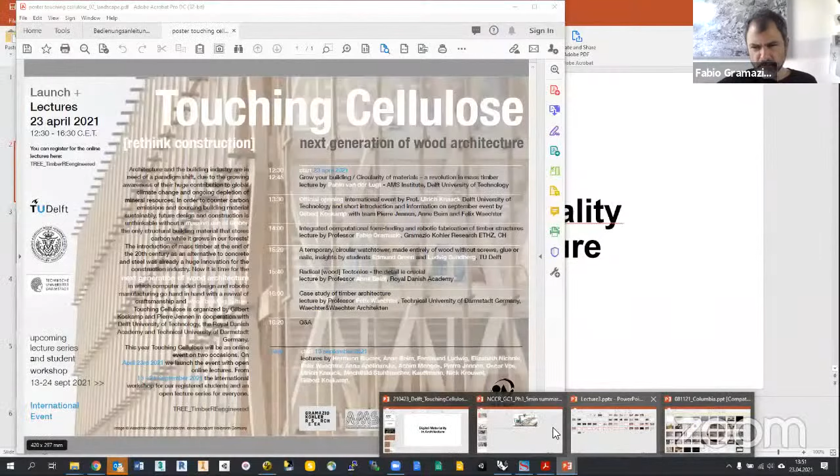Screen. Here we go. Do you see the screen? Yes, perfect. Thank you. Excellent.

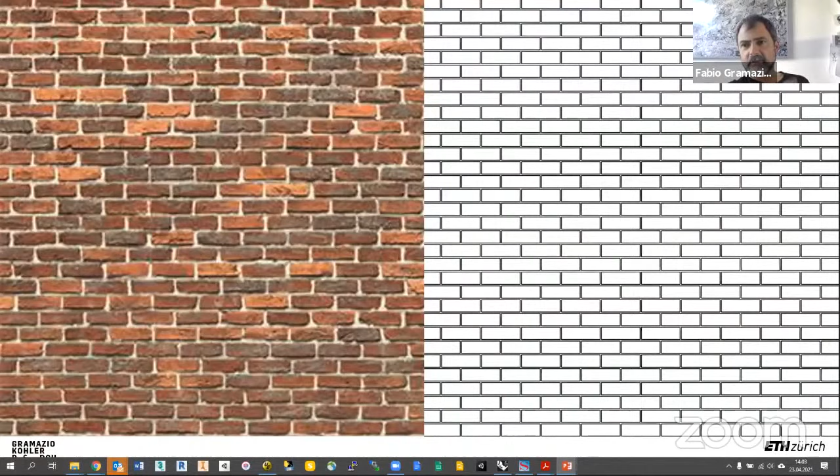And the question is, in architecture, in design, how do we represent it? What's the notation we have or can use to describe it? First of all, a very simple one is to just draw it. This is what you see here. You can draw it by hand, with pencil, print it, whatever, but you have a visual depiction of it. This is very powerful as a notation because you immediately understand what it is. But when it comes to construction, it's also very weak because it's very complex, very unclear and very inefficient.

Now, the history of construction, or of culture and construction, has generated a concept like the bond, which is nothing else than a set of rules shared in a cultural area that encapsulate everything, encapsulate the sequence. So everybody understands how a stretcher works, and every mason can just do it. And the only thing humans need to do a stretcher bond is a few simple parameters that boil down to the element, the size of the element, the type of the element, the length and the height of the wall. That's it. There is this advantage here that with a minimal description, a minimal amount of data, you're able to instruct something very complex in a very lean way.

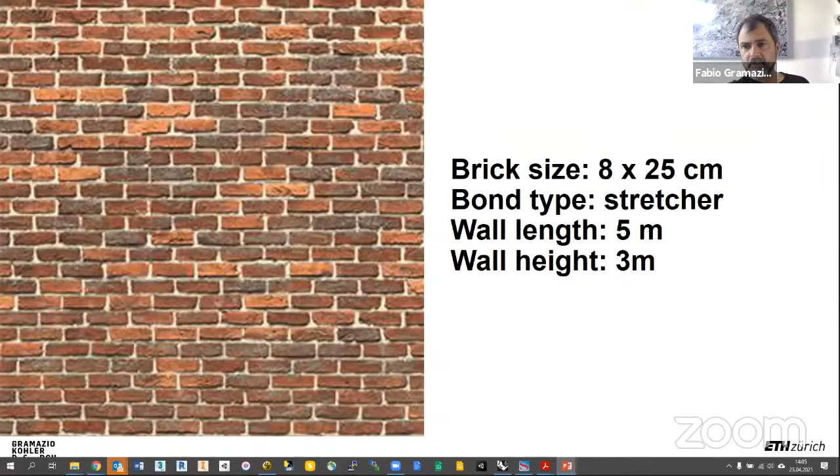Now the question for us, when it comes to machines, is what is the equivalent in digital fabrication? If we have to talk to machines instead of humans on a building site, clearly, even if now we have artificial intelligence and machine learning, the machine doesn't understand what a stretcher bond is. How should she? Machines understand data, numbers. And the nice thing here, this is why I use this example to explain the problem and its potential, is that there is an algorithm that is the basic control structure of everything: the loop. A loop in programming is just the instruction to repeat an action or a computation a certain number of times, until a certain condition is satisfied, for example.

Now, a brick wall is nothing else than the direct correspondent of a nested loop. A nested loop is as simple as a loop. It's just two loops nested one into the other. And this is what you see here. You know, for, then again for.

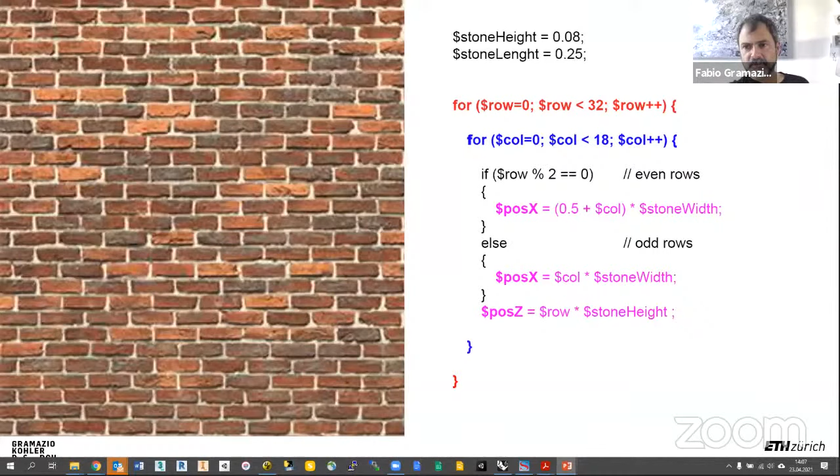Once this is done, in the outer loop, the position of the whole thing is raised by 1 brick height, shifted by half brick length, and repeated. So another row, and when you reach the ceiling, you're done. The algorithm stops. So this is a different notation to describe the exact same things to a machine. Now you could say, so what? The trick is here.

If now we look at this code and recognize that we don't have to use it just like this, but we can add, for example, these 2 pink lines at the bottom. Everything else is the same. 2 pink lines have been added, and there is some computation happening there that is, as the names of the variables suggest, about a rotation. So the brick is not just placed, but rotated on its center point.

And these 2 lines are an act of design. This is the human on the left. In this case, it's a student. The student looks at the material, tests with his hands the possibilities in space to do something, and then he writes these 2 lines. So actually he's designing, and this stretcher bond is not a generic stretcher bond anymore, but is outputting this.

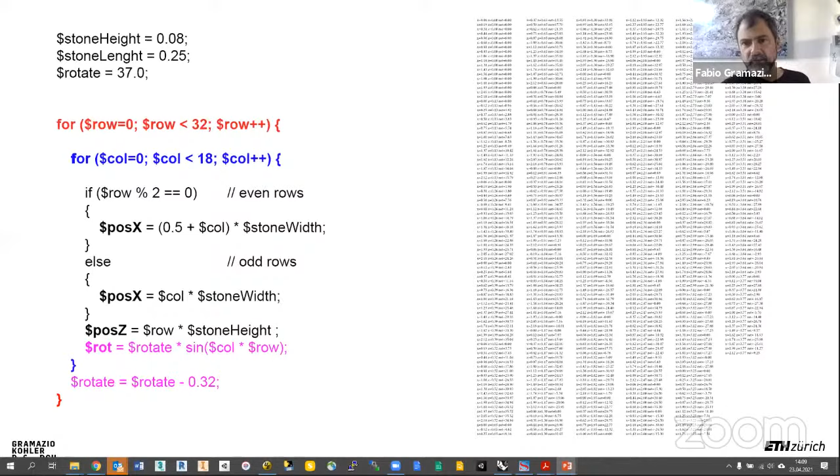So it's a very unreadable list of numbers, but you can trust me, these numbers are nothing else than XY positions and a rotation. The XY position is easy. The rotation is not, because each single brick of the wall we have seen before now has an individual rotation. And this is the thing you cannot communicate anymore to a human, but can communicate to the machine. And you can communicate it better because the machine doesn't understand what a stretcher bond is, but the machine understands very easily a number, because it's the only thing a machine understands. And the number correlates to the position of a motor, to an axis, and at the end to a position in space.

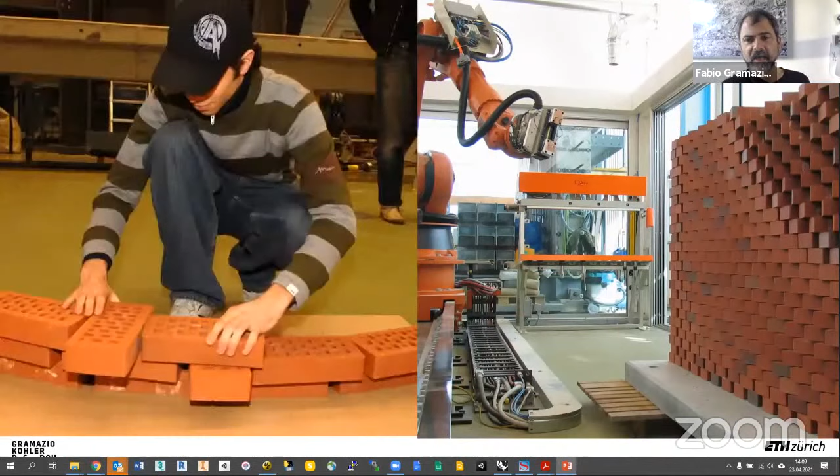So what we have here, if we go back to the beginning, is the possibility to directly connect the act of design by a human with a machinic execution. And this is extremely powerful for a few reasons. First, because it goes beyond automation. It's not about automating something we already do. It's about reaching out into a domain to which we don't usually have access.

And the second thing is that there is no competition between the human and the machine here, because the human needs the machine. Otherwise, there is no reason to design 5,000 bricks with an individual rotation. And the machine needs the human, because the machine is not designing anything. The machine is just executing things.

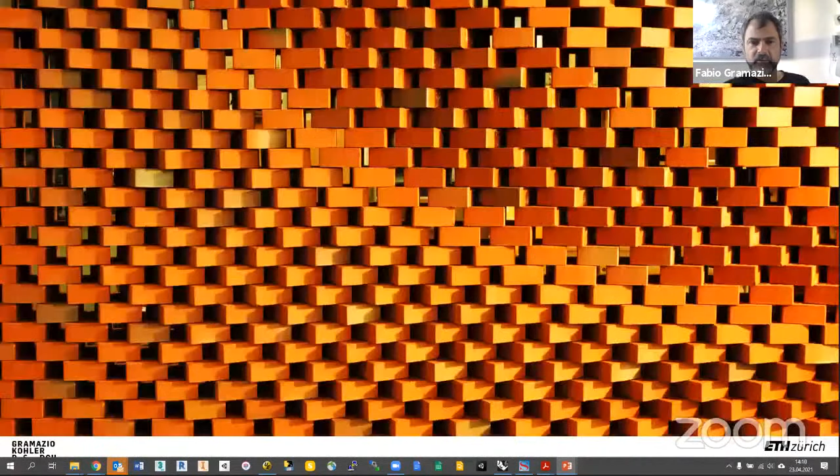And this very simple exercise was the very first experiment with this machine when we installed it as a proof of concept. And the bricks are more or less the consequence of pragmatism, because we needed elements and we looked for interesting elements we could get for free or very cheap, and then suddenly we had this in front of us, and at this moment we coined the term digital materiality, just instinctively.

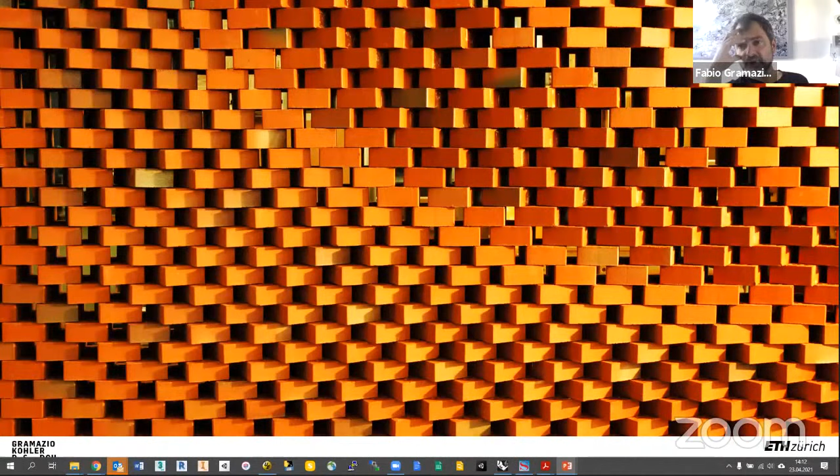And throughout the years, we started to understand what it really is, because here something happens that is related to the physicality, so three-dimensional space. It's all about light, and light is just reflection of waves on a surface, and it's about the relationship between the position of the light source and us, the observer. Light changes color or makes color visible at all.

And at the same time, beyond this very familiar material, something happens that we have never seen so far. We were used to seeing these things in the two-dimensional domain of graphics. Computer graphics in the 90s were already popular, but it was always two-dimensional. Here it's woven into the material. So it's these two apparently very different domains that in the 90s, when we were architecturally socialized, were enemies: the digital and the physical, the digital and the material, the digital and the analog, no communication. Here they come together and they merge.

And with this knowledge, and this is just a few images, we did one or two projects where we scaled this up, and then really understood what happens at that certain scale.

What is this? What is the potential of being able to control material at a very high resolution? And we understood that we don't need a techno material. We need very traditional materials, and just need to inform them differently, and then they become a new material.

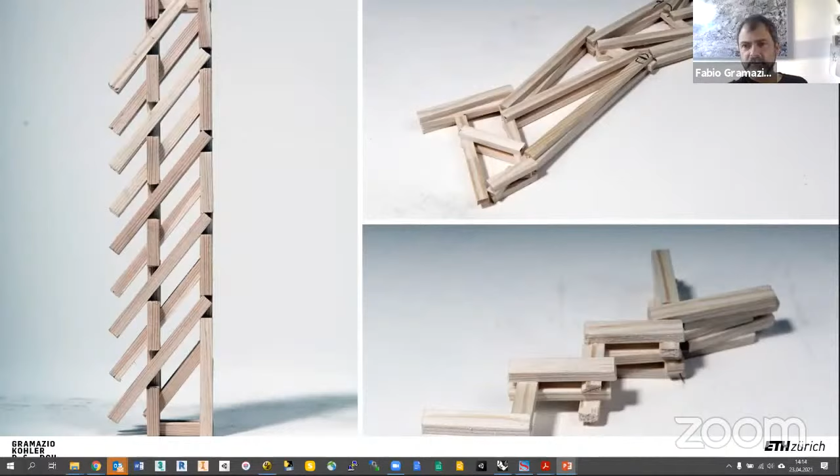Okay, now let's move to timber finally. These are projects that I haven't shown for probably about 10 years, but thinking this morning about how to tell this story, I searched for them. These were first studio works, 2008. This was 2 years after starting at ETH with this machine, where at a certain point we wanted to explore what happens if this bulk material, the brick, so standardized, mass-produced material, can not only be placed at a certain position in space, but can also be processed.

And timber is nice because it's an industrial mass-produced material that comes in many shapes and CLTs, layerings, and so on. But actually, if you have a slat, for example, you can cut it to length with a very simple operation. You can cut it to length and you can choose the angle of this cut without adding any complexity to the fabrication process. And here you see first studies.

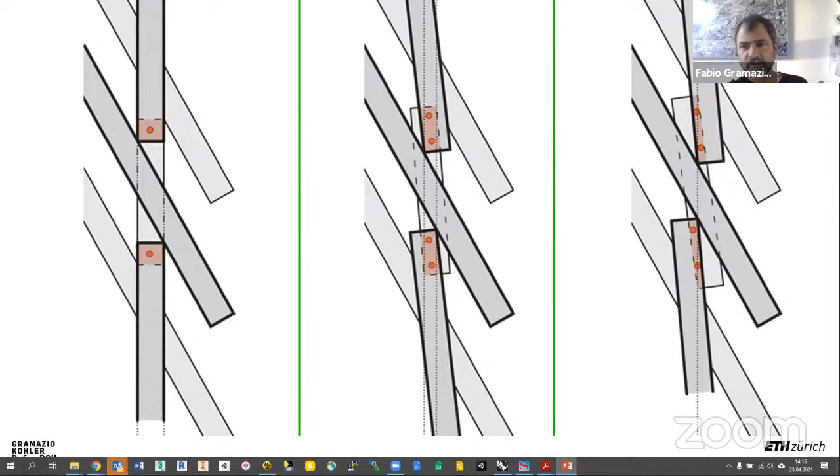These are model studies with students where we try to find layering logics that would allow for, first of all, parametric description of it, and then design, the manipulation of these things. This happens physically, this happens then digitally. You have to find out, okay, what is the degree of freedom? When do things collide? How is the relationship between these things?

And then we built this. This was with our first robot. A very simple process. The machine picks a long slat, orients it, gives it the length, and then the human cuts, and the second human, once it's in place, screws it in place. So actually it's an identical process as with the brick, but with one additional degree of freedom, the length. And what this produces is extremely interesting.

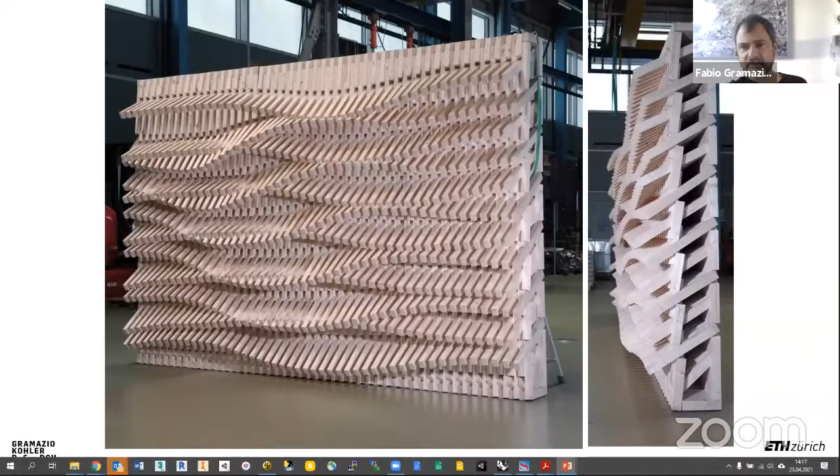This is the stacking. And these were these first results. It's in the same format as the previously shown brick wall. It's prototypes. It's 3 meter by 2. And here you see 3 different variations, where with one mass-produced timber element, always the same section, with one process, so one cut, and the computational design process, plus the very simple pick and place process performed by the industrial robot, these emerge.

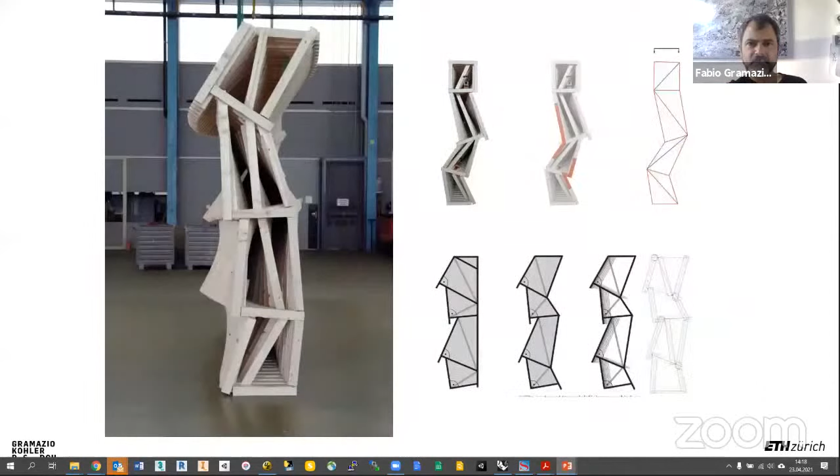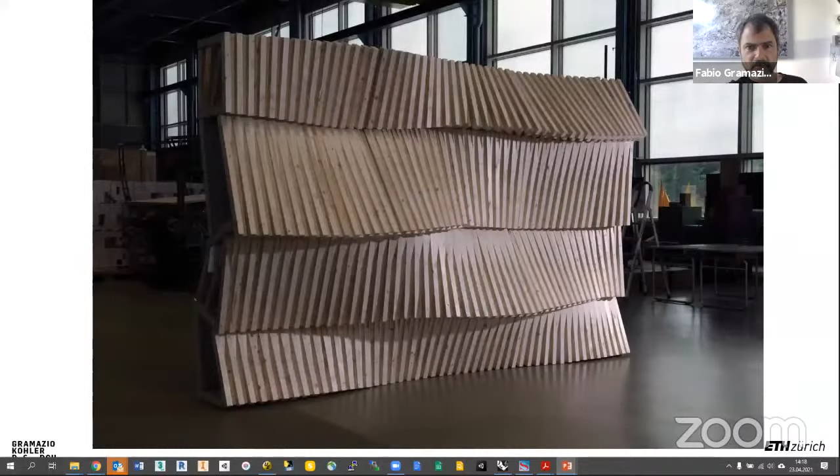The close up. This is interesting because this is the backside of the same, completely different. Although, if you look, actually you sense what's happening on the other side, but it's extremely minimal. This is the second one, slightly more complex, also very beautiful. It's just additions of discrete elements. This again is the backside of this same element.

Okay, so these were small scale student experiments. There was discussion, yes, but structural performance and costs and all these things were not a topic. It was really about discovering something. And then a few years later, we got the chance, and this is where Anya comes into play. She came from Foster and Partners to the professorship, and started working on this project I'm going to show now, the sequential roof.

5 years ago, we got a new building, a new lab for the institute. And by some very interesting coincidence, back then the board of ETH was extremely open to experiments. And we proposed to them to integrate research into the building. So if you were building anyway, it would be a good chance to test something. And we said, let's scale up this timber structure. And we came up, this is the final project, with this. This is a timber roof structure.

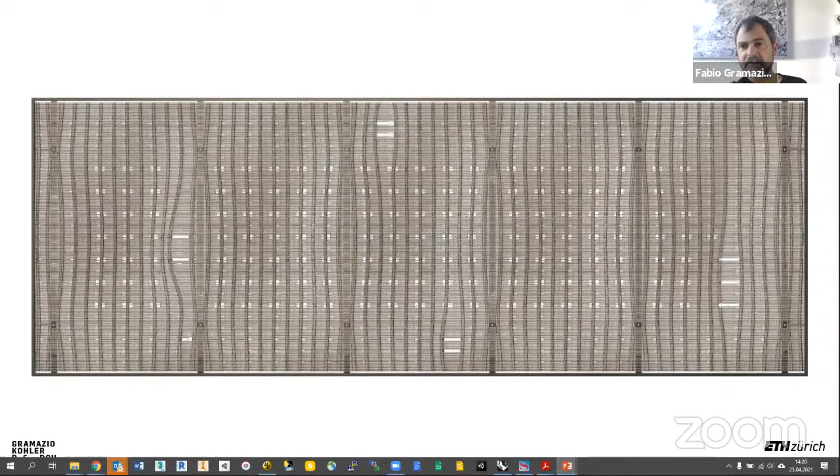And if you look at this image, you recognize how at this scale and this resolution, you know, how soft it gets. This feels and is a fabric, textile. Of course, when it's built, it's not a textile anymore, then it's very structural, but as long as you design with it, it's malleable, because every piece is potentially and actually different, or doesn't have any reason to be identical to the last one.

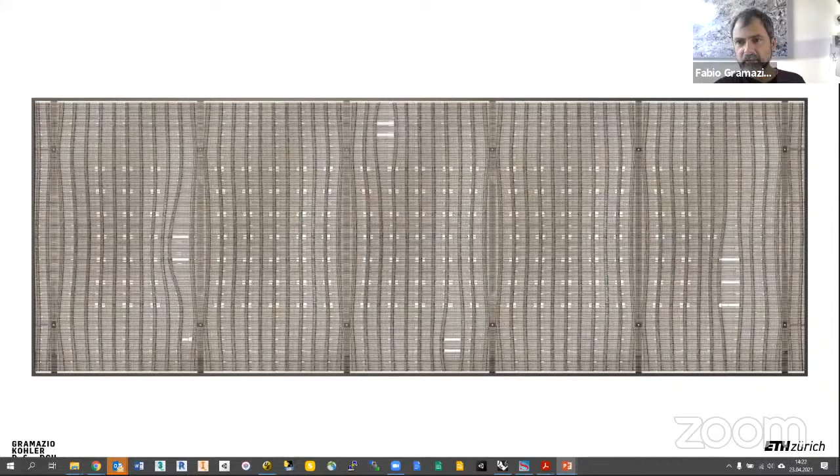And this allows you, for example, you see this irregularity. These are smoke ducts from the staircases that have to go through, and everybody that already built knows that these things change all the time, and the final dimensional numbers you get often too late, and then you have just to cut through your structure, which is ugly. With this design principle, we were able just to tell the fabric to make place for these ducts there. And because it's all parametric, until the day when production started, we were able to change this.

Okay, this is the constructive system. So it's trusses, I said 15 meters, with diagonals in them. It's produced in layers of heights of 120. They are, of course, all different, because there is complete freedom of shape. And the interesting thing here is to deform this roof doesn't cost anything.

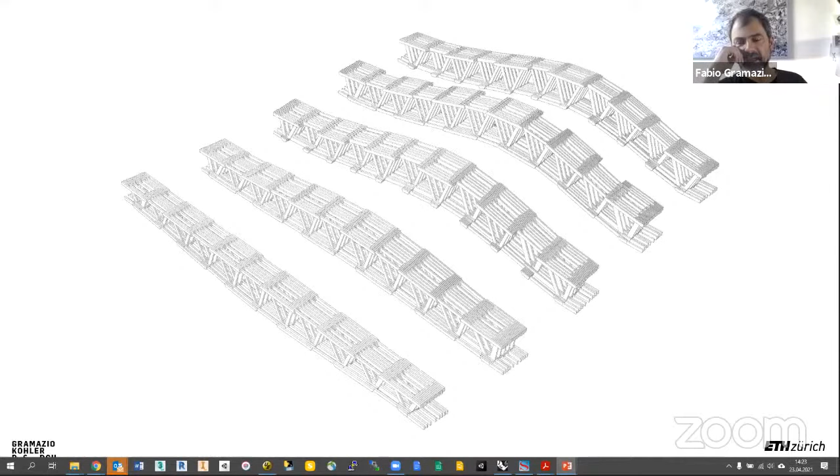So normally you have a very, let's say, rigid correlation between form and costs. As long as things are planar or simple, then it's cheap. And if you leave the planarity, then it's not just a bit more expensive, but it's 3 times the price. This is the logic of things as we know them. With such a process, it doesn't make any difference. This roof could have any shape, it would cost exactly the same and need almost the same amount of material, because it's all information making the difference.

Yeah. The shape here in this roof, of course, was generated by the water flow. The water evacuation is in the columns of the building. We'll see later on. So we needed 12 low points where water would flow and would be collected and evacuated. And so this very simple design driver was informing this free form that, of course, in the interior then structures the space, brings in a rhythm and so on, and plays with the light.

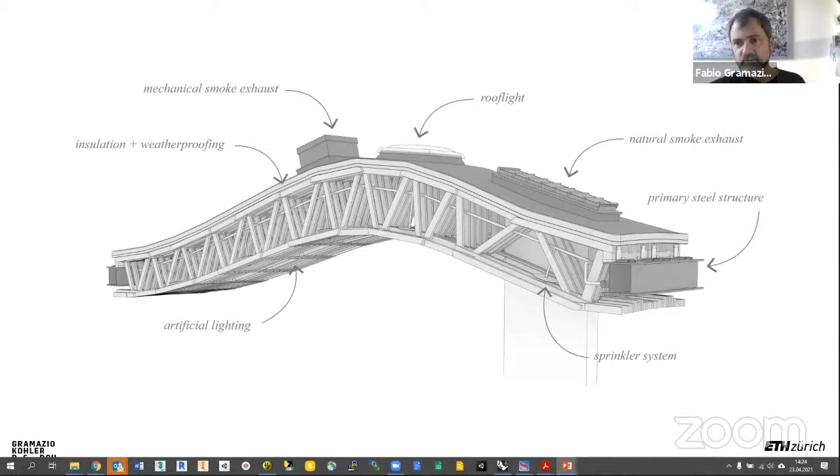Here you see, this is the prefabrication paradigm. If you do this in a shop, then you can install all the subsystems already. This is particularly important if you have a complex and custom form, because to introduce sprinkler pipes in here on a later stage would be a nightmare. Here it's extremely simple because it's open.

And what you see here is the design, or let's say a superimposition of different design models, where the bottom right of it is what is interesting for us, because this is the designer's first decision about the logic of the roof. So you have to ask yourself, if you want to control the mutual relationship of 50,000 parts, you need to decide how to control them. So what are the parameters that you want to be able to modify while designing? So what is your

tool? And you want to be ideally free to manipulate, in this case, these sectional lines, until the very last moment. And everything else has to propagate, because the next stage that you see going up towards the left top, this is the structural model. It's an RSTAB model that is extremely important, because in such a design, the structural engineer has to be included in the loop. And everything has to be automated, because there is no structural engineer that wants to model 50,000 different parts in order to understand what the forces are. And even if you would find such a crazy engineer, you would have just one iteration.

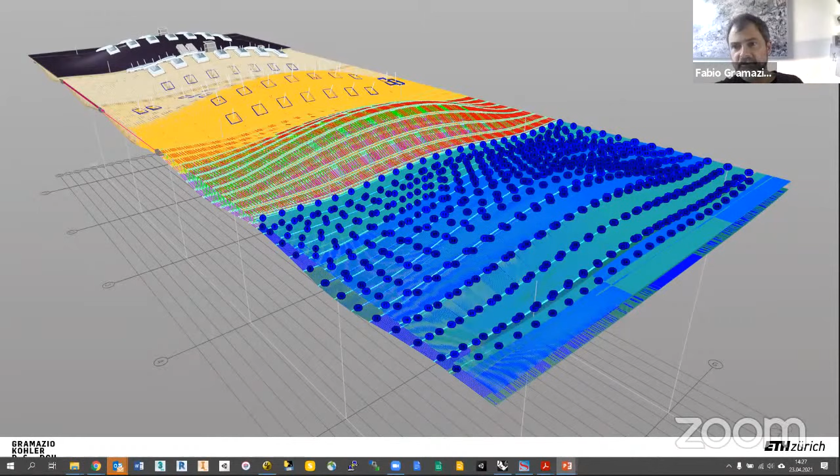This BIM model is dynamic, because if I change the shape of one of these control lines, the BIM model adapts to it, or tells me, listen, this is not possible. I get into this conflict.

And the connection in general, but in timber architecture, is extremely important, because the connection is the weak point. Normally, structures get dimensioned against the connection and not the members. This is also why there is a lot of engineering done in super sophisticated timber plates, connectors, and stuff like this that introduce steel. So we'll talk about this later.

Our wish here was to be extremely simple. And we identified the nail as being this connection system that is super flexible, because I can scale it. I can say I have just one nail, two nails, I have 15 nails if I really need, to transfer loads. And with the digital tool, with the robot, I can shoot them wherever I wish.

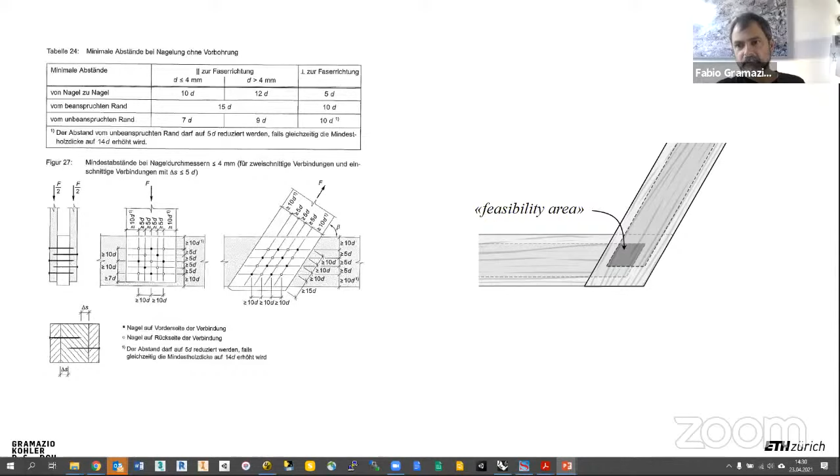that tells you that you need a certain spacing between the nails, and spacing between the nails and the edge of the overlapping area. Very simple, empirically validated things that become a problem if you have almost 1 million nails. Because over 50,000 elements, you have 1 million nails. This feasibility area, this is what I said before, can dramatically change. This is why you need computation, again, to find a place where to put these connectors.

And because you will not always find a solution, then you need a strategy on how to react to this unfeasible situation. As you see here, on the very left you have the problem: nails that are outside the overlapping, the feasibility area. And what you can do is to extend the horizontal one by 1-2 centimeters or whatever. So you increase the feasibility area, or you can increase or change the section.

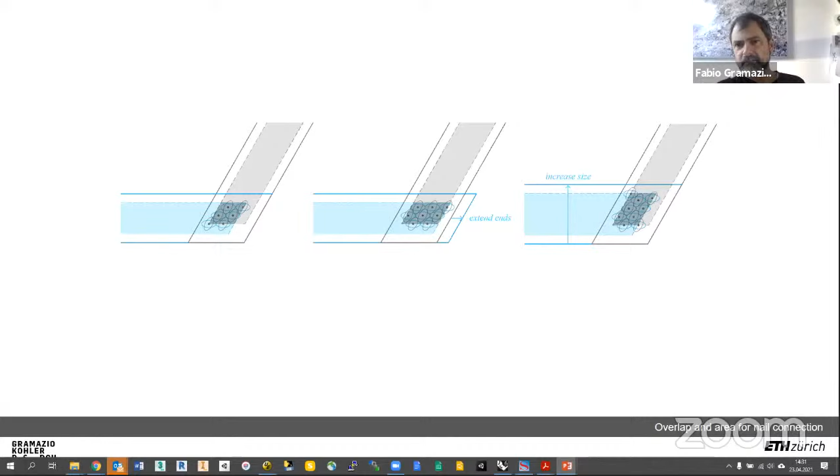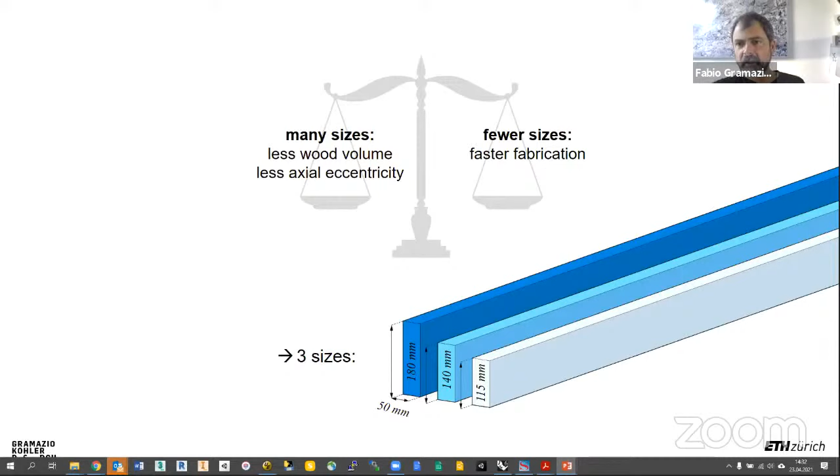Now, the first solution is the cheap one because it's just information. So you give it a bit more. The second one is more tricky and needed optimization, because of course you don't want to lose the beauty and the elegance of the process, the leanness of the process, just having one slat, 8 meters long, being cut in parts and placed. If you start to introduce two, it's already more complex. You have to have two places where to store them. If you have three... so it's a question of trade-off. How many different sizes do you want?

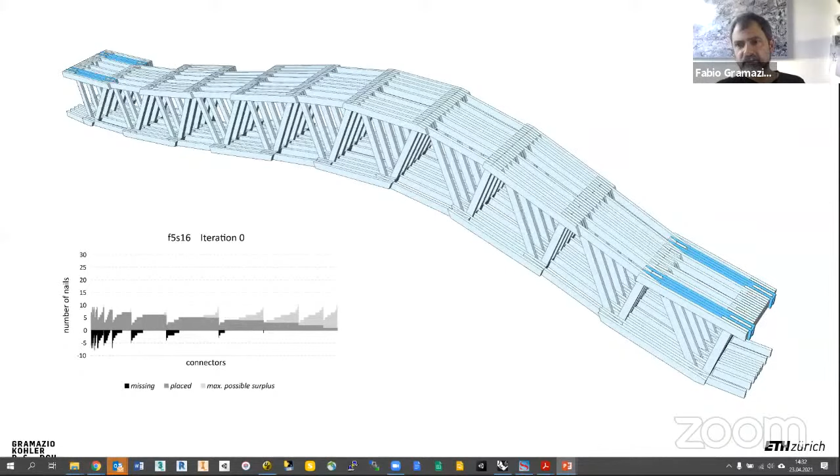And this was then a classical optimization task, where you algorithmically go through all these trusses and try, by trial and error, to solve the problems iteratively and understand what this means. You see here iterations. These were the three different height sections that were chosen, and by doing this many times, you can find out where you have this sweet spot, where with the least amount of different cross sections you have the best result.

Because to increase the cross section also means that you need more cubic meters. So you're using more material. Now you could argue that with timber it's not so dramatically important to save material as with concrete or steel, but still. And this was the final solution. So we ended up almost where we started. It's a very small increase in material, because we found the elements where this

is absolutely needed. And having this freedom of mixing different cross sections avoided what normally happens in architecture for many reasons, economy, but also intellectual laziness: the simple solution, just to increase them all. You see which one is the weakest one, let's do them all like this. This is also the reason why we use so much concrete. Design is not complex and elegant anymore, because it's simpler to calculate, to design, but also to produce.

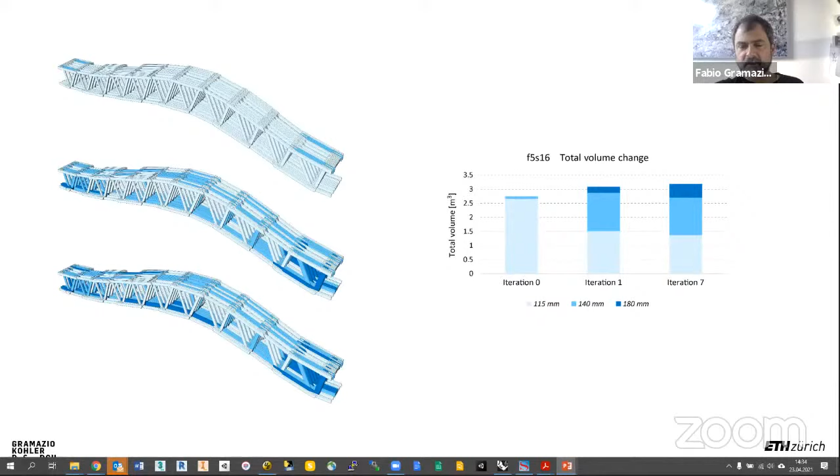This has to be automated, and the interface has to be clear, so that there is no manual intervention needed in order to validate a new design option. Then you need the fabrication data. For example, the nails, because there are things that pop up that influence, propagate back to the model.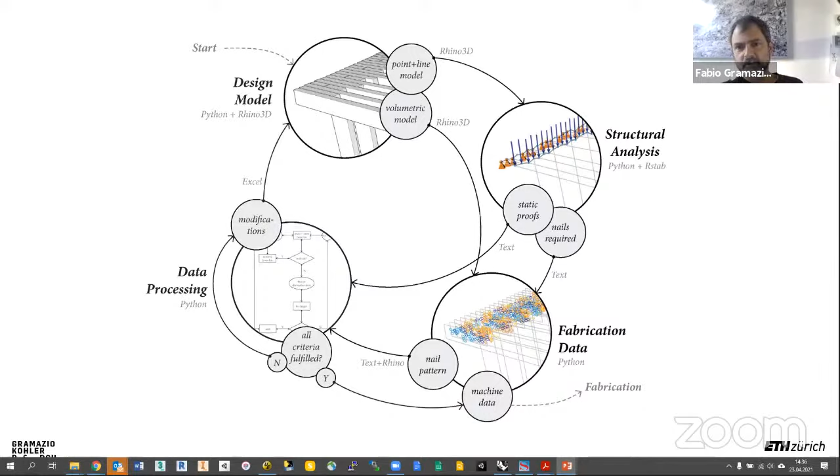And the last step is the data processing. That's where the results of these analytical steps are, let's say, inputted into the design model. And then you start with a new geometry or with new cross sections and whatever, and you do it again and again and again until you have found, I wouldn't talk about an ideal situation, but a good one. The best doesn't exist, but there are many good ones. And it's about finding a good one.

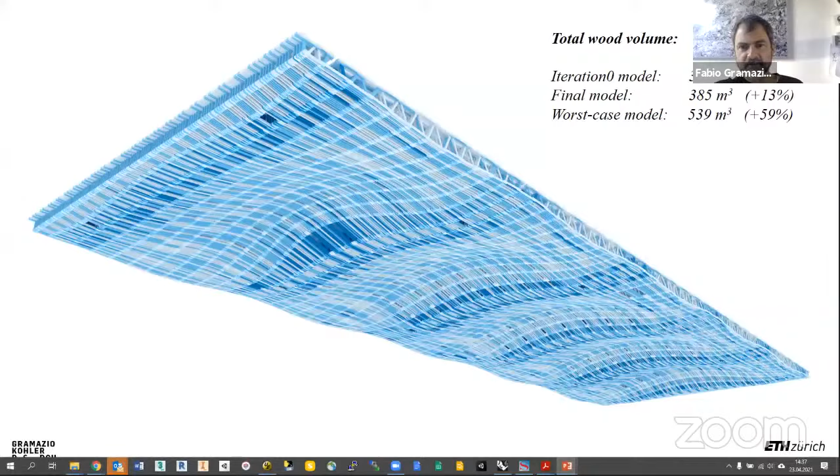Here again, now this optimization process on the whole roof. You see, with the small cross section, we would have had 340 cubic meters, while with the final model, we ended up with 390. And if you would have just said, okay, let's go for the worst case, then we would have had 540. And these are big differences. And the only thing is computation in between that makes it possible.

Then, of course, these are all theoretical models. I mean, not theoretical, just models. But at the end, you need to go and test these structures, real scale, in order to understand, to validate your assumptions, your models. And this is then the final result. I think I have an audio here.

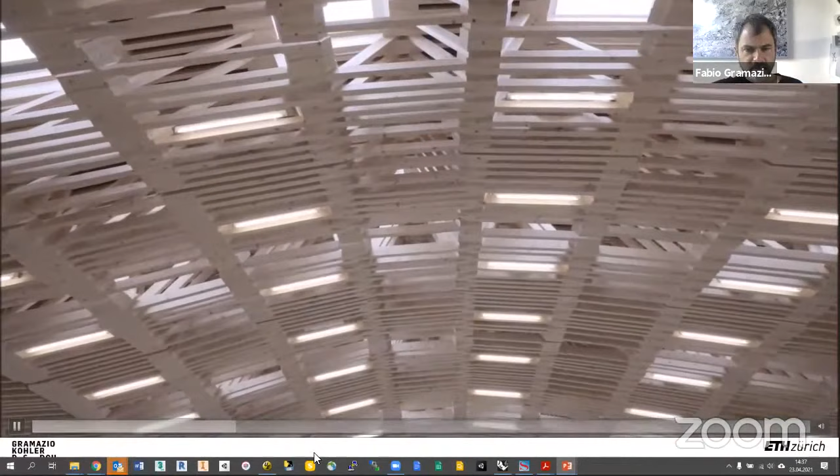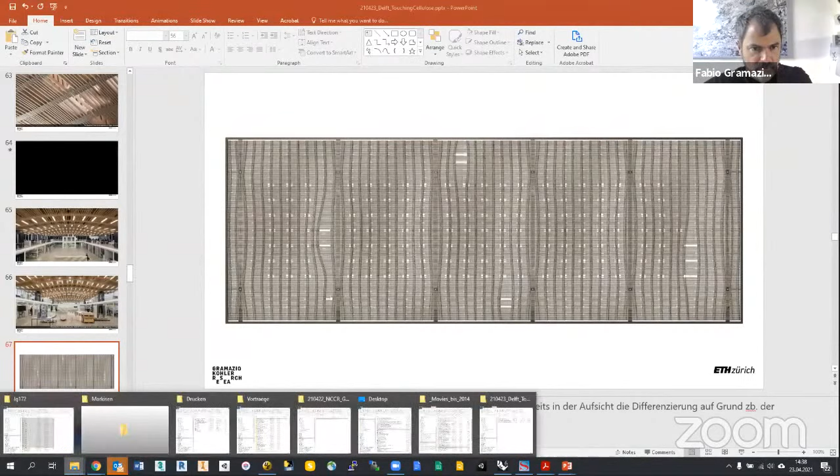Gilbert, can I ask you, did the movie play well? Because I don't know if maybe I stopped the share. I forgot to switch on this. There is a checkbox here. Yeah. Okay, do you see the share again? Yes, perfect. Okay, good. What I wanted to show quickly, I forgot to include it into the presentation. I have a movie that shows the fabrication that is interesting, but for some reason I don't have it in here.

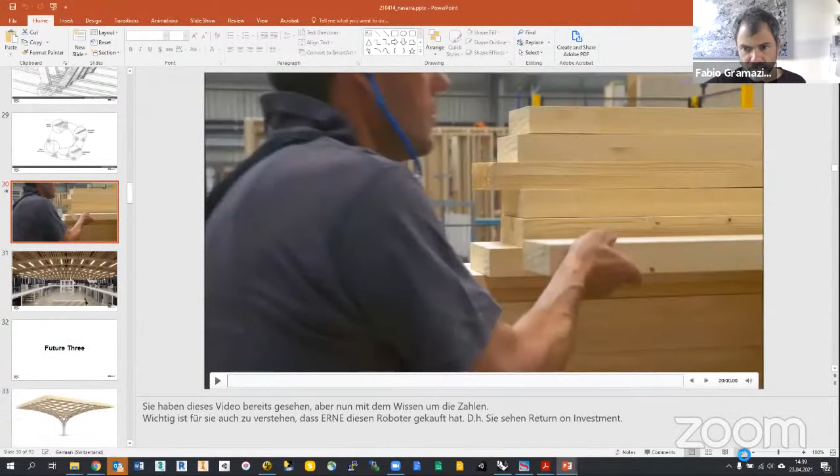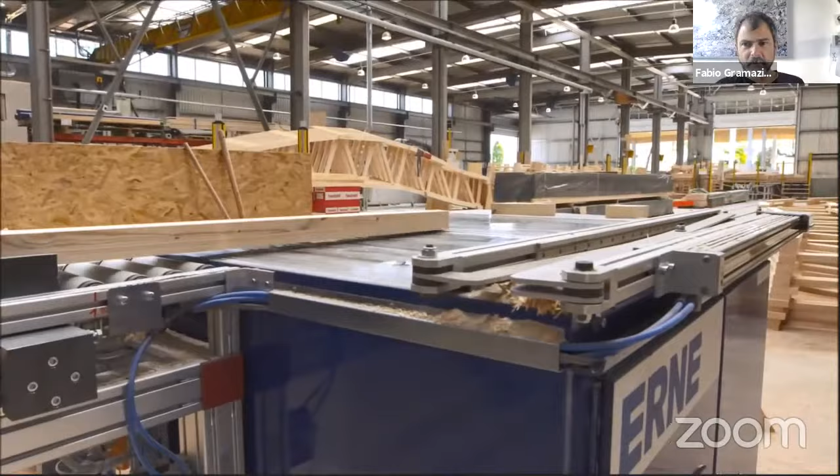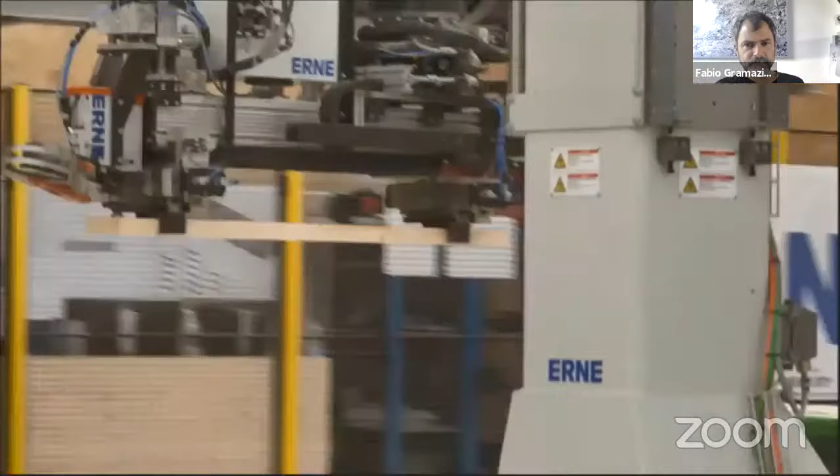Here we go. Now let's see if this plays. Does it play? Okay, here you see this process. You have a big robot, takes the element, puts it on a saw, two cuts. The angle is free here, can be any angle. And then the robot, this is a robot that usually produces serial timber wall elements. And again, you see that basically it's nothing else than a gigantic 3D printing process, where the element gets deposited in the right place and then fixed with the nails.

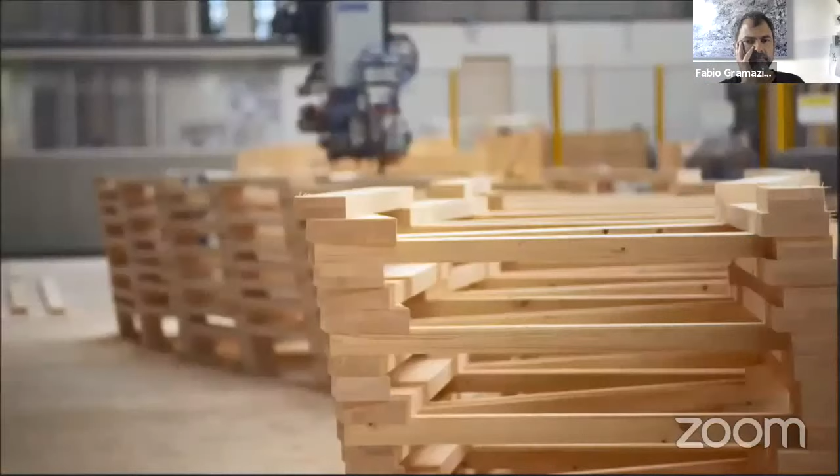And then once the elements are printed or finished, you move them to the side and install them. Now it freezes. Yeah, that's good. Okay. Let's go back. Here.

Okay. Now this was a process that still relies on layering. This is also why it looks so similar to a 3D printing process. Basically, it's layers, it's stacking. And it has been industrialized. I would say it's fairly simple, doesn't need research. Now we go into a series of projects that are much more demanding from the technical point of view, and they also ask for completely different solutions.

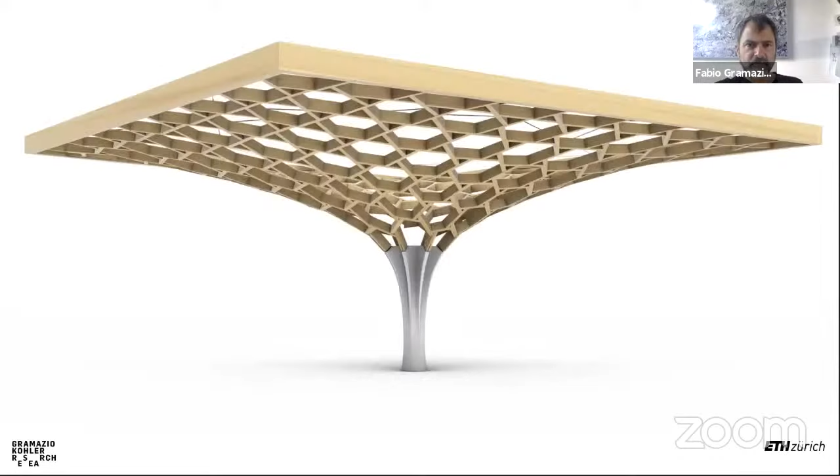The first one is a project called the Future Tree. This has been done for a client, a Swiss engineering company. The design was an outdoor structure, shading a restaurant. And what you see here is that this is not flat anymore. It's curved.

And the problem here is that as soon as you leave planarity, you run into a huge amount of problems you didn't have before, because this is now the same nail, or in this case, screw problem, that was already tricky in 2.5 dimensions in order to avoid collisions and find a place to put things. Here it gets completely 3-dimensional. But with computation, you can still manage to solve this.

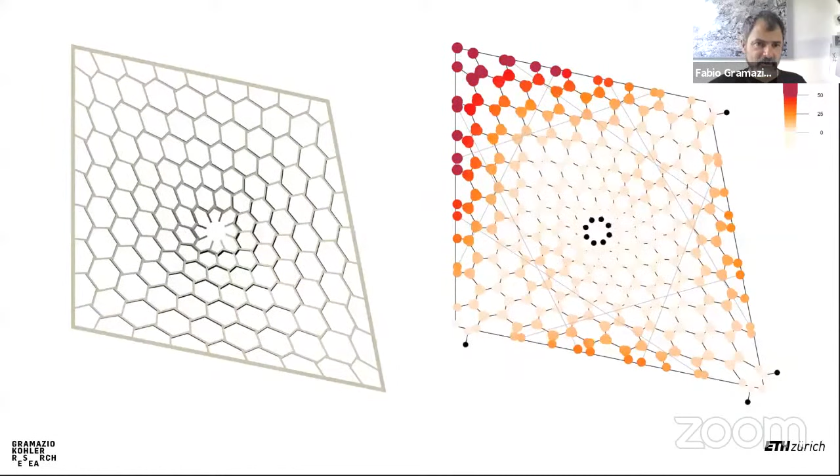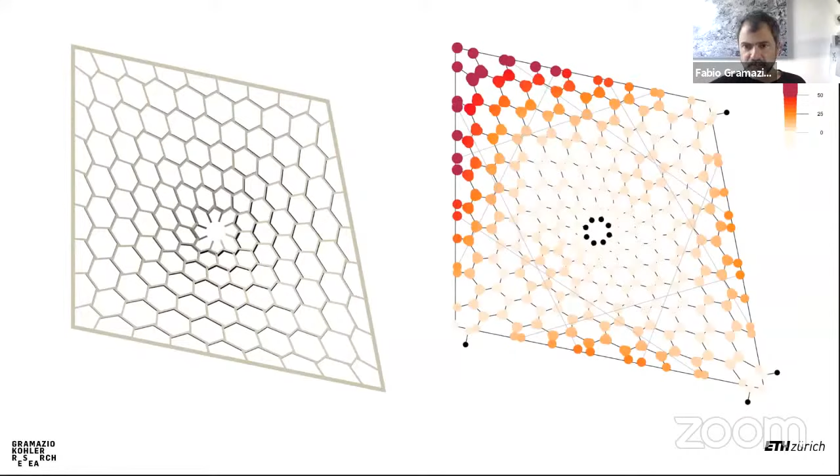This is a classical simulation on deflection and the analysis of how this structure, so the opening, in this topology, would influence structural stability. This is the elementation. So, in what chunks can you produce this?

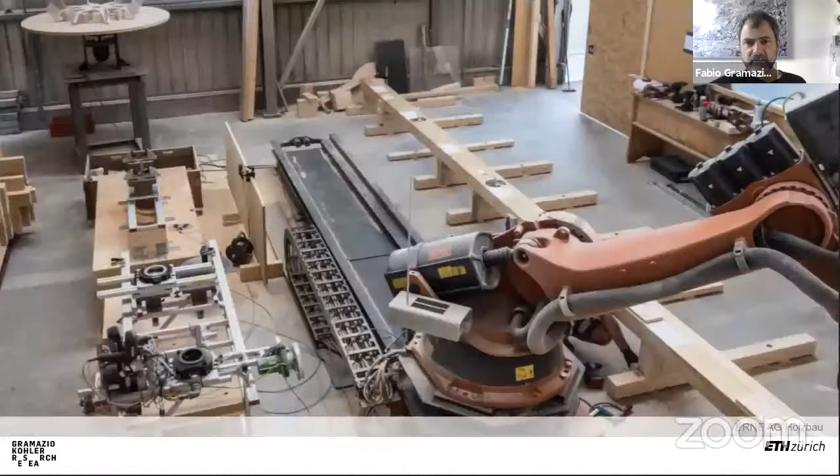And the problem here, or the potential, is that, as you see in this movie, you have to produce this in the air, because there is no table anymore where you can put it in order to stack elements. So these things are completely free in the air. The robot, as in the last process, is bringing the element, placing it where it should be, and then it can be connected.

Now, this could be misunderstood as being exactly the same thing as we've seen before. And theoretically, it is the same thing. So it's a machine bringing something in space. The problem is that with a material that is not exact, and there is no physical material that is super precise, or the more precise, the more expensive and unsustainable materials get. But timber is alive, so it's a material that with moisture, temperature, and so on, deflects, deforms, stretches. So you have to deal with tolerances.

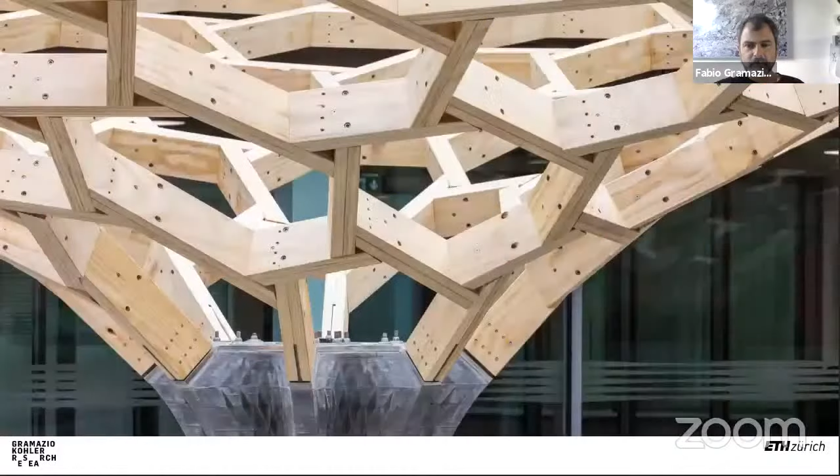And as long as you stack the elements on top of each other and then nail them, this integration of tolerance is fairly simple, because in the worst case, it's just the addition of different, not so exact cross sections. Here, this imprecision propagates directly into the geometry and brings you in a situation where it just doesn't work anymore. But still, here we managed, but it has been tricky to build this very beautiful structure. But we encountered challenges by doing it robotically.

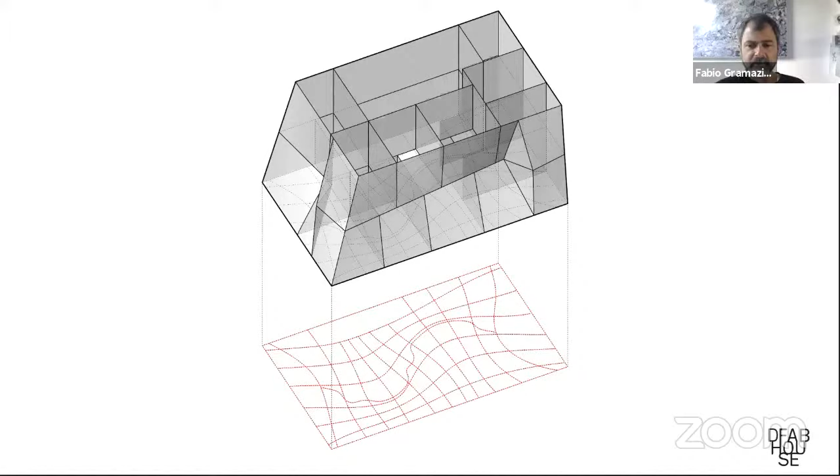Here you see the first step of this design is of course the elementation, for deciding if we are able to build it because of its complex geometry, as we have seen in the future tree, in the air, so in three-dimensional space, and not on a flat bed and then erected. Then we need to decide what chunks to produce, what logical elements belong together, and then how could we at the end connect all these parts.

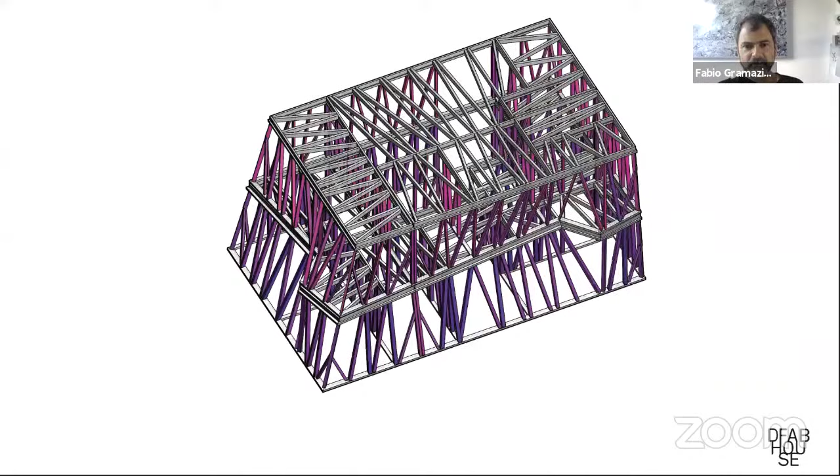And out of this, you have to start to design a topology, so the connections, what belongs to what and what is connected to what. And these two things are of course interrelated. And out of this, you can then generate geometry. And as soon as you have geometry, then all these questions that we have seen before, how do things connect to each other, how do you build them, and where do you expect tolerances or imprecision to happen, come into play.

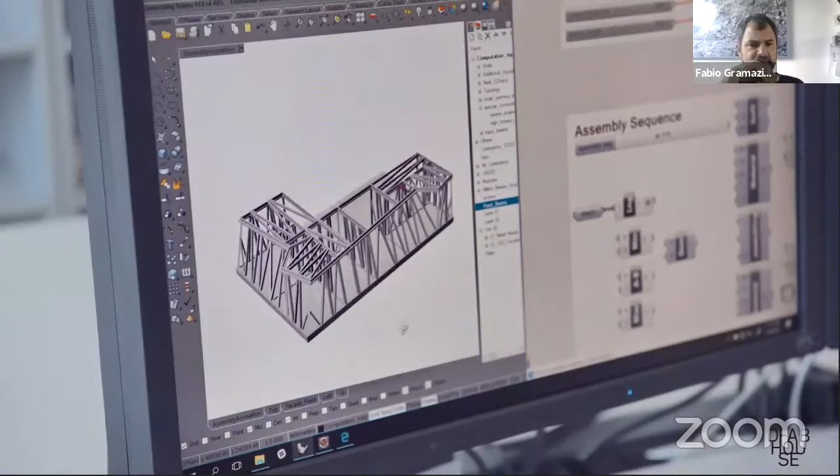This was now not done with the industry partner, but directly in our lab. And I have a movie here that shows this design process. You see here, robots bring the elements, the human connects them. Basically, the machine acts as a sort of guide, but it's not a fully automated process.

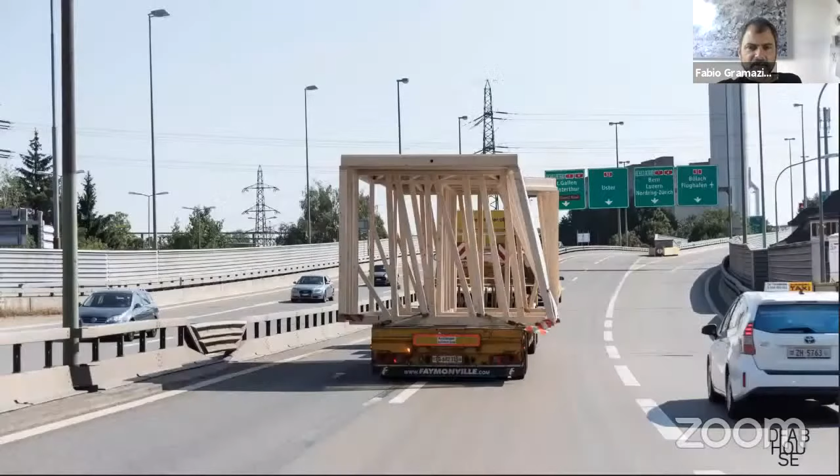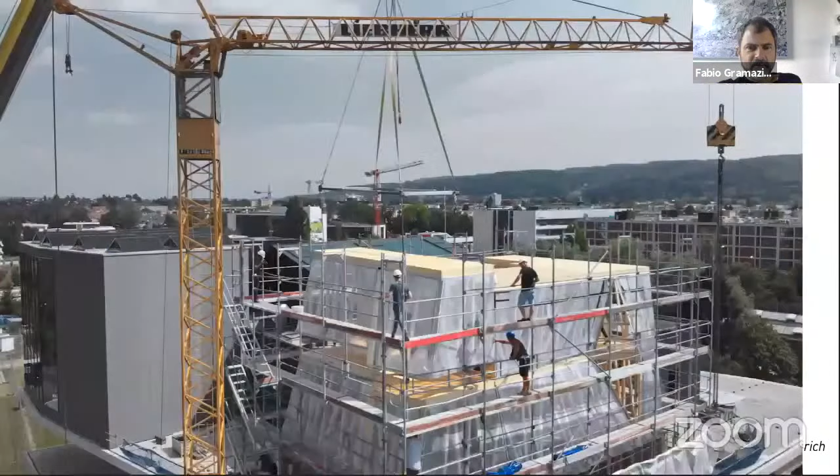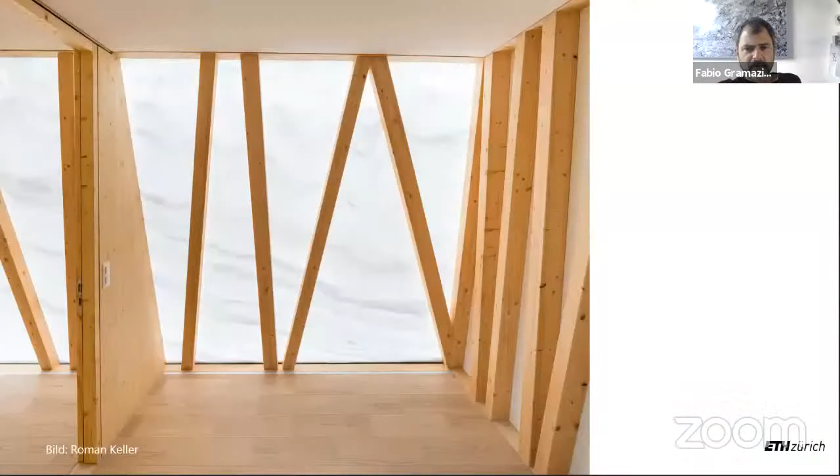So these things have been produced, trucked to the building site, and erected. You see here, everything is fitting together. So once you have assembled these things, then you have perfect control on geometry. It's the assembly itself that is the tricky part. Very complex then. But I skip these interior images because I'm a bit running out of time.

Here we go. What I would like now at the end to address is this: the DFAB house is demonstrating that we can build complex three-dimensional free-form aggregations of timber elements robotically. At the same time, we realized while doing this that at many ends we run into extremely complex issues and problems, just because things were not fitting, and we had collisions and so on. All these things can, of course, be solved. It's not impossible, and we demonstrated it.

The question is, is it meaningful to envision full automation only because it's technically possible? You know, we have been to the moon 50 years ago with incredibly old-fashioned technology, but it works. But it has been incredibly expensive.

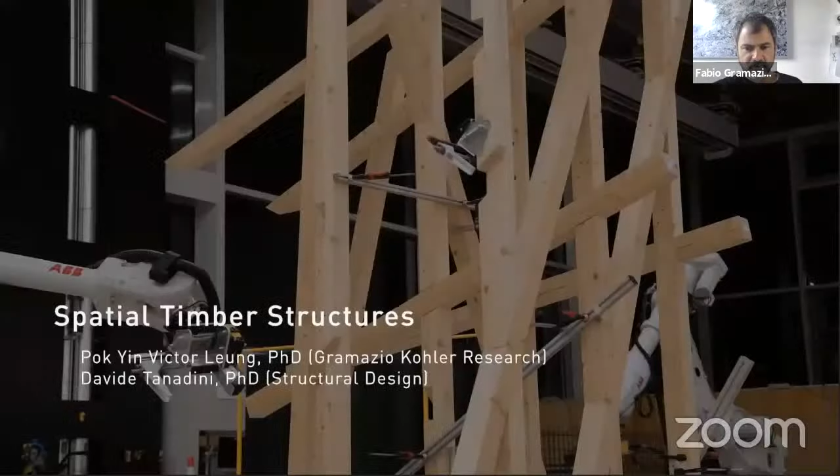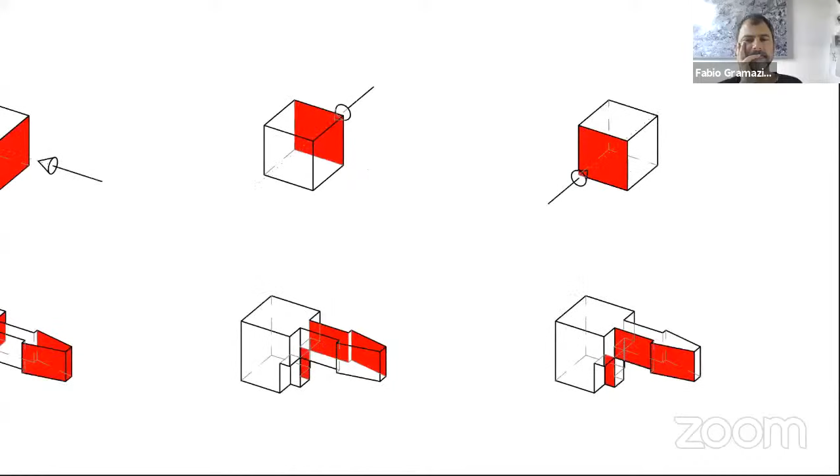The Spatial Timber Structures project investigates timber frame structures with bespoke integral timber joints. The first innovation lies in the extension of the plastic theory to timber, which in this project is adopted in the analysis and design of timber-to-timber joineries.

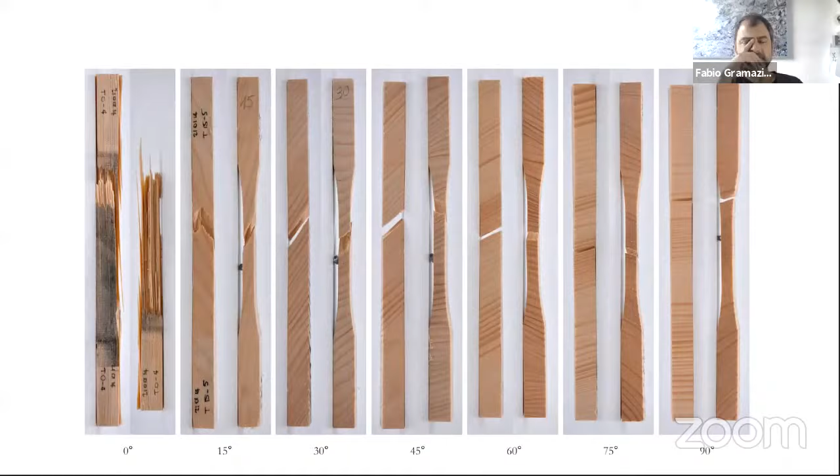By means of simple considerations, it allows capturing the behavior of intricate geometrical details, fostering the use of bespoke and optimized connections. In this regard, it is necessary to assess the yield condition and the plastic material behavior of timber. They are defined by a theoretical model supported by mechanical tests. The definition of the yield conditions allows identifying the structural capacity of timber and its failure modes, thus determining the governing failure mechanism for any stress states.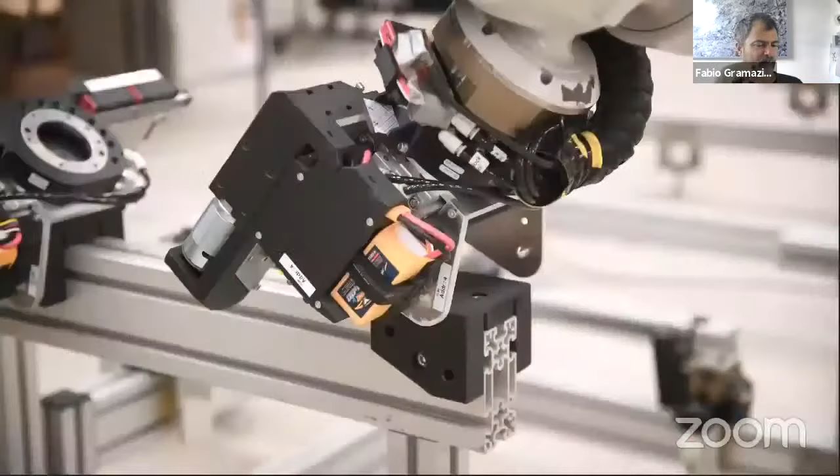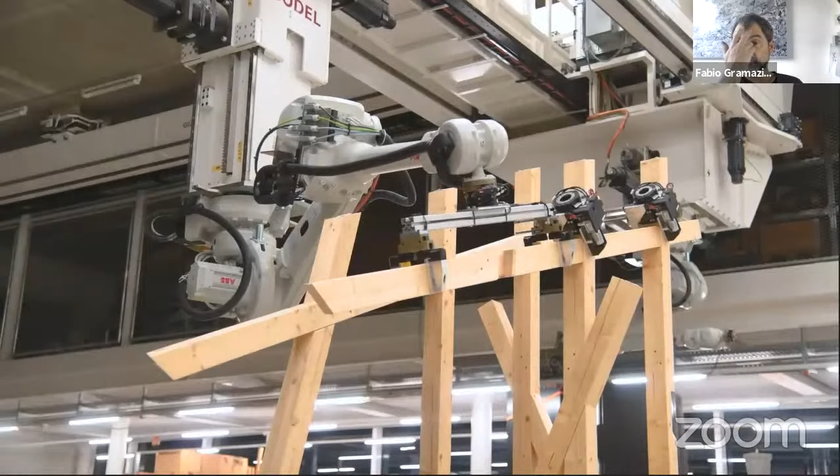The second innovation is a robotic assembly method based on distributed robotic clamps specifically designed to overcome the challenges of timber joint assembly. The new method uses remote-controlled and synchronizable robotic clamps in cooperation with industrial robotic arms. The clamps contain a high-force actuator to overcome friction and correct misalignment during the joint engagement. Until now, we have iterated 3 clamp designs with increasing degree of flexibility for lap joints with different angles.

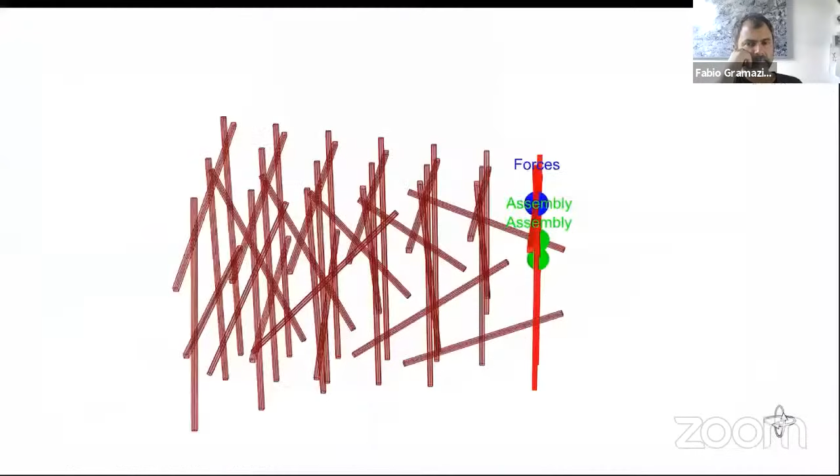For demonstration, we have designed a structure that consists of 40 elements. Once a sketch is created based on an architectural intent, the design is supported by a computational tool, which interactively and in real time provides quick feedback concerning forces and assembly. After the initial phase, the process splits into 2 tracks.

The first track focuses on the analysis and design of the timber-to-timber half-lap joint. Based on the global structural analysis, the forces acting on the connections are determined. The connections are then geometrically optimized in order to enable a better utilization of the joint. A software supports the intention of the designer in this process.

The second track is to specify how the robotic process is performed. This includes assembly sequence, joint directions, the locations of the robotic clamps, and how the robot arm grasps each element. We formulated them as automatic design checks and provided the designer with feedback while making decisions for these interconnected problems.

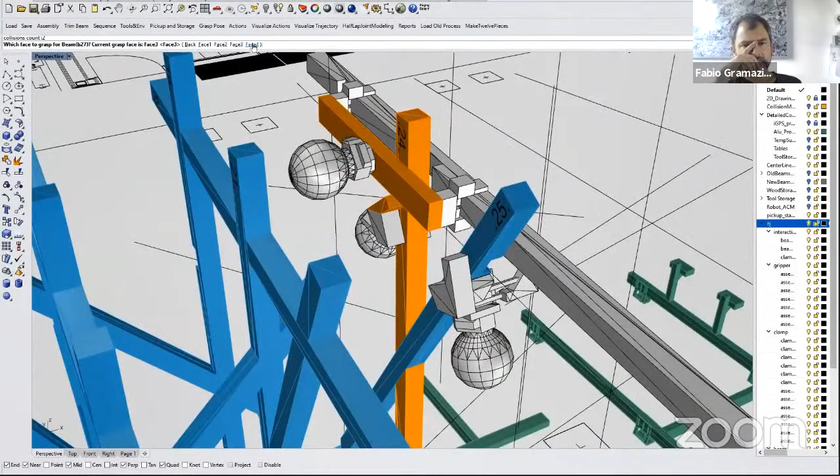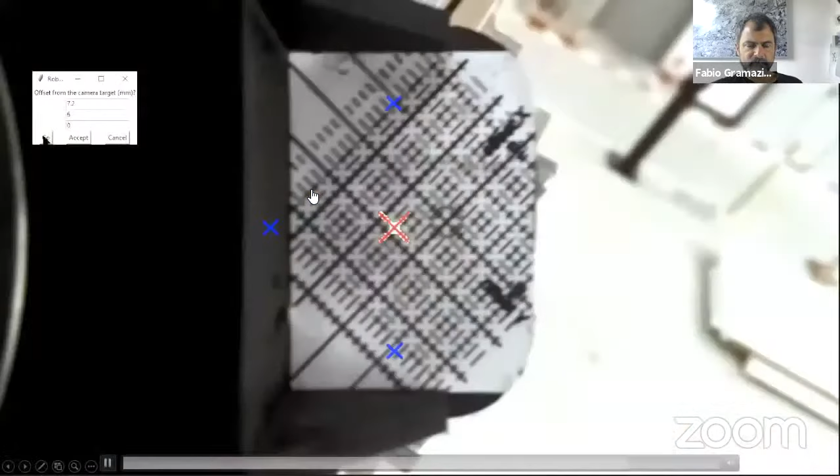Once the design stage is completed, an industrial CNC timber joinery machine is used for cutting all the joints. The design data is processed to create robotic trajectories and control code for the various movements used in the assembly. This includes movements for the robotic arm to attach and detach clamps on the structure, to pick up and transfer timber elements, and for the clamps and robotic arm to move synchronously for joint engagement.

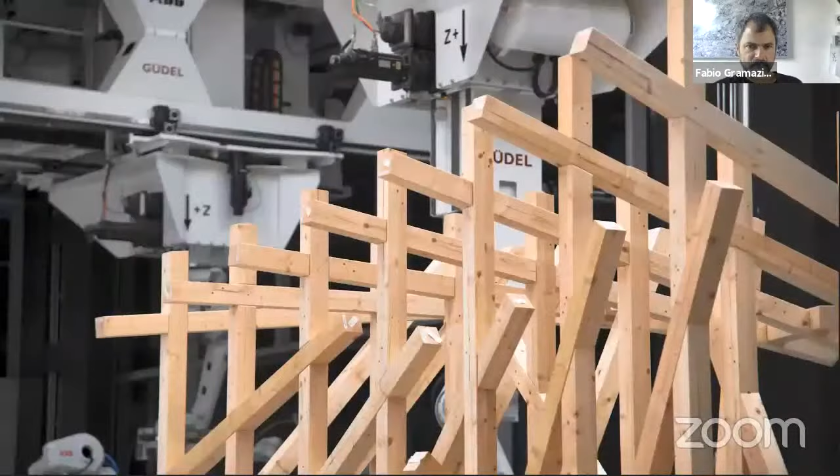In short, these are the combined efforts of the two PhD projects investigating timber joint design and robotic assembly, providing the ability to assemble structural connections in 3D, resulting in timber structures that have rich architectural and structural expressions.

Thank you. Okay. And now on this title, I would like to stop. This is the outlook. This is then our next step. We identified augmented reality as being the technology that is starting to be mature for industrial adoption, that allows to truly integrate the human into such production processes that we have seen here.

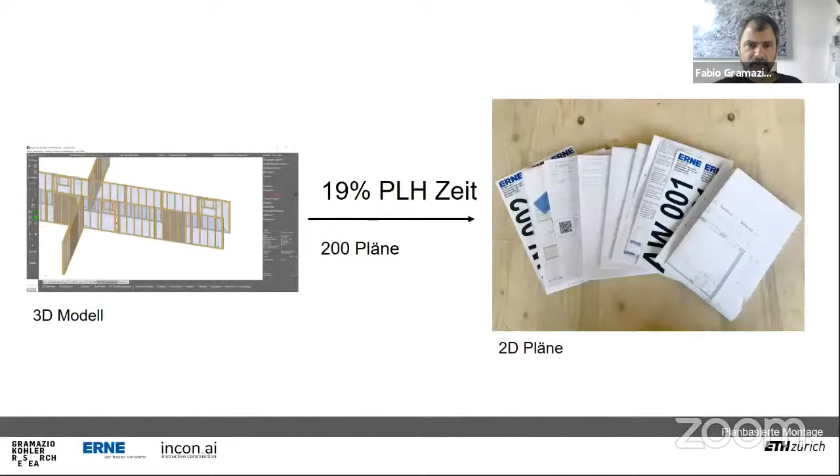Because with augmented reality, the human is able to see and thus understand what the machine, what the data feeding the machine is in real time. And by doing so, the human can help the machine, be helped by the machine, or intervene. Because there are many things that are extremely simple if you do them manually, and extremely complex for a machine, and vice versa.

I think if we start to now leverage on such technologies and really mix these two realities, then this separation of jobs that I've introduced at the very beginning with this robot building the brick wall that we discovered 15 years ago, where the human designs and the machine executes, now can be mixed at a completely different and even more interesting level, where the machine can help designing, and at the same time the human can help building.